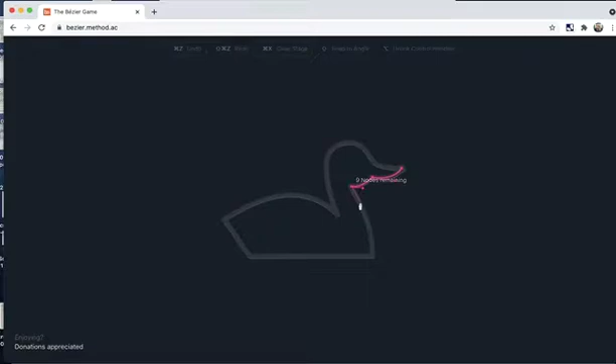Come down here, you want to have a slight curve again, so click, drag, hold down the Alt Option key, bring it back, and release. And again, just as a reminder, Alt on a PC, Option on a Mac. So when you hear me say Alt Option, one is for PC, the other one is for the Mac.

All right, so I'm coming back over here and I'm just going to click because these are straight areas. Click straight, and then now we have a curve. So I'm going to click and drag. See if I can get this to fit. It fits. So sometimes what I do is I kind of just play with it. If it fits, I'll stick with it. If it doesn't, then I know that I need to come back and use a handle.

Let me undo this really quickly. And if the radius was really sharp, then I would probably do something like this. But I want to try and do this with as few marks as possible. So I'm going to undo that. Command or Control Z is a way for you to step backwards. So I'm doing that twice. All right, so Control on a PC, Command on a Mac.

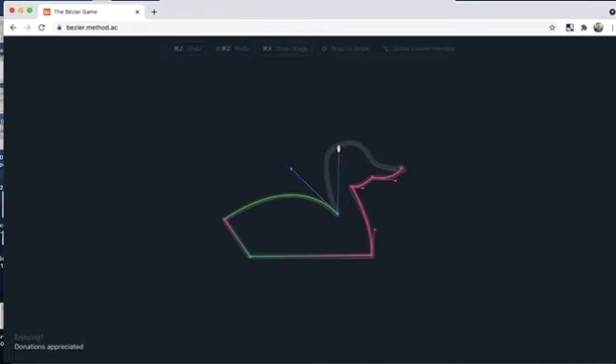All right, so now I'm going to click drag. And again, you're playing with the handles to kind of figure out where your curve is. And once you get your curve, as I'm still holding down the trackpad, hold down the Option key, bring this back, release. I'm going to come over here and let's see what happens if I pull on this. Okay, so I have a nice curve. I'm going to let go.

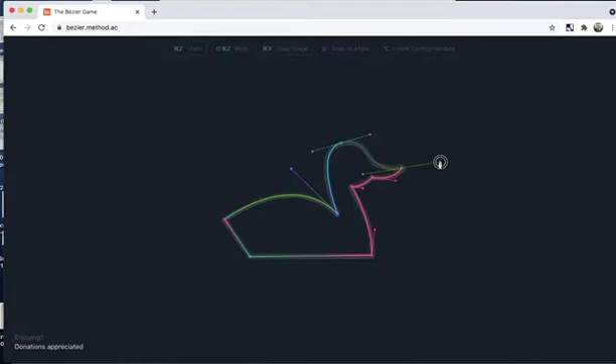Now, let's see what happens if I can do this. Pull on the line just a little bit. As you see, it's not straight. It's following the line, the motion of the head. And let go. And there you go. I finished it. So the next stage, now we're going to do the hat.

And again, I'm trying to go over each step and my buttons, things that I'm pushing, etc. So you guys can kind of follow along and hopefully not get too lost. But the best thing about video is you can go back and rewind it to watch it again if you get confused. All right, so we're going to go where the dot is blinking. So click that. We're going to stick with a straight line.

Now with this, we're going to come over here because this part's going to be straight, but this side is curved. So we're going to pull the handle, make sure we're within that line, hold down the Alt Option key, bring it back, and let go. So what happened is it didn't stay all the way in because, as you see, when I pulled this over, it went outside of the space. So that means I have to undo it. So Command or Control Z.

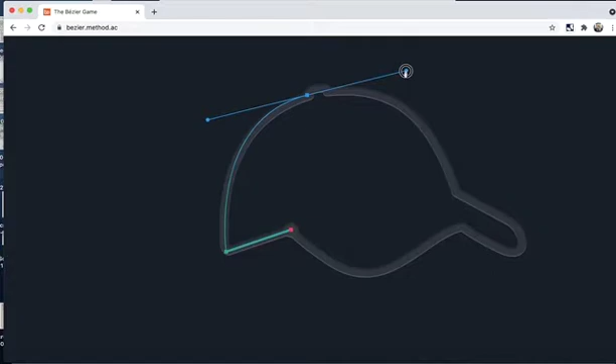I'm going to come back over here, go out a little bit further. Then let's try this again. Click, drag. Now it looks like I'm within the space. Hold down the Option key, bring it back, and release.

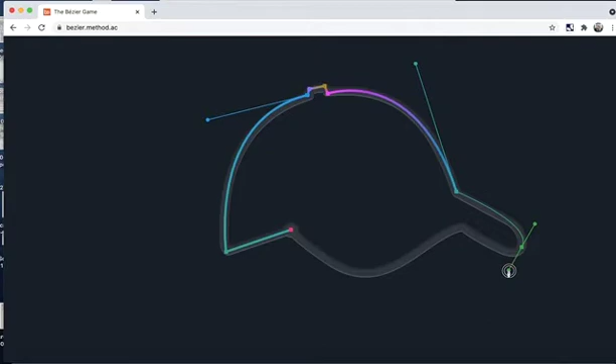I'm going to go straight across and try the curve again on this side. So click, drag. Make sure you're holding down everything. And now what I'm going to do is hold the Alt Option key, bring it back, so I'm only using one handle, and then release. Come over here. See if I can do this with one. Click, drag, release. Just click because now the arc is similar on the other side.

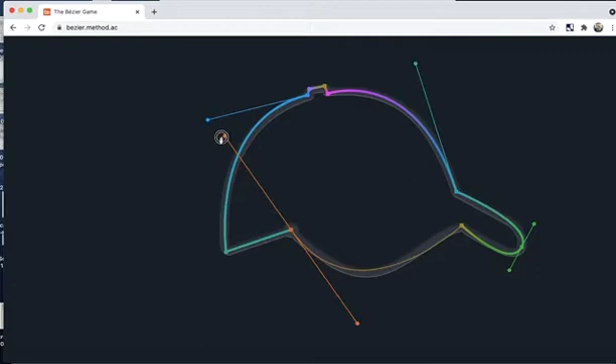Click. Says 2 nodes remaining. Let's see if I can do it with one. Sometimes yes, sometimes no, depending on the arc. Looks like I'm not going to be able to do that. So I'm going to come here, kind of pull, and then, whoops, kind of pull a little bit, and then come up and snap.

All right, so I'm going to zoom back out again, go to the next stage, the S. Okay, so I'm probably going to make some mistakes on this one, but just to show you where we're at. So click. This one looks like it's got a pretty strong angle. Undo that. Let's see, what will happen if I, nope, too sharp. Okay, undo, click, come over here halfway through, click this.

Now to get that curve, I'm going to hold down the Alt Option key and bring it down just a little bit because that one looked, you know, the radius looked a lot tighter. So, oops, let me turn that off. All right, so I'm going to come over here and see what happens if I do this. Up too far. Okay, so come over here. Still too far. So I'm going to come over here.

And again, I still make mistakes. That's okay. Everybody does, and that's the cool thing about art is you just learn from your mistakes, right?

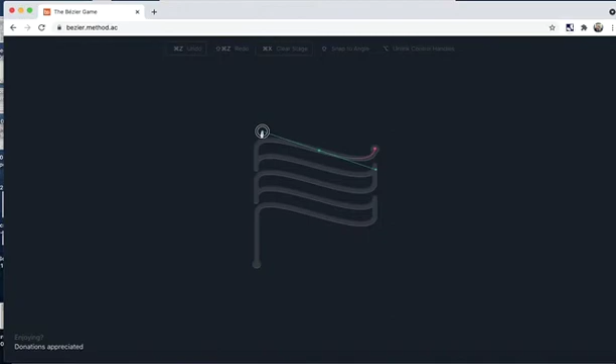All right, so now we're going to try the next stage. So this one looks a little bit tricky, but you'll see a pattern here on how I'm working. So we're going to click the dot right about here, we're going to use this, hold it up, and the cool thing is whatever happens on one side, you're going to be able to get the reverse because now instead of pulling up, now I'm going to pull down. Now go straight, come back over here to right in the middle,

and this pattern is going to follow the same, right? So click, drag, release, click, click straight, then come over here and click, drag up, release, pull, go down with the pen tool, click, click straight, come over here, click, drag, release, come up, click, click, same thing, click, drag, now pull up, release, click here, oops, click here, and before I move further, I want you to kind of see how these are all lined up. So the curve will match.

If I pulled up after I did this, then the curve on this side would be similar to this, but since here I went up and then I went down, you'll get basically the same line, but on opposite sides. So this went up because I went up here, and then this went down because I pulled down after I lined it up. Okay, so now I'm going to click the spot and next stage. Oh, and that's it.